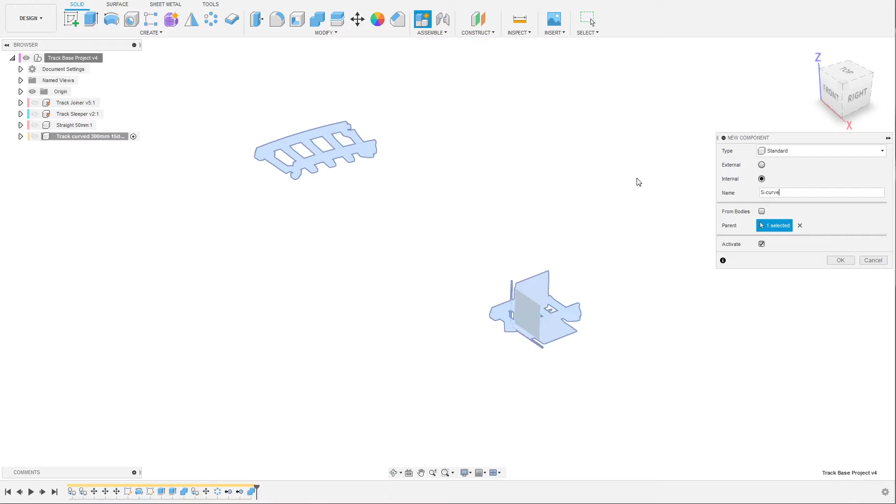And the values I choose here are just random, how long it is and how much side displacement, so you can choose whatever you need for your project.

So we do the same as before. We copy the joiner, we paste it, click OK, and we paste a new one.

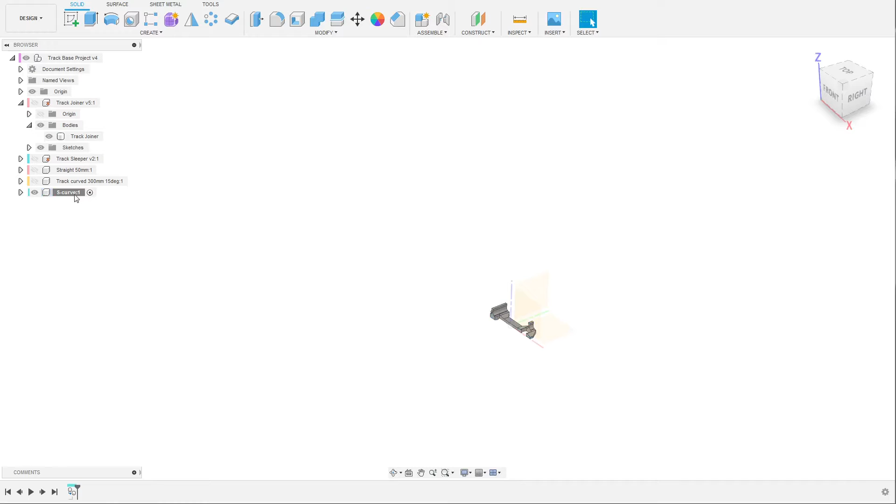Now you see I accidentally clicked OK and forgot to rotate it, so let's do that now. As before, we need to set the pivot point to the center. Click OK, and we will rotate it 180 degrees.

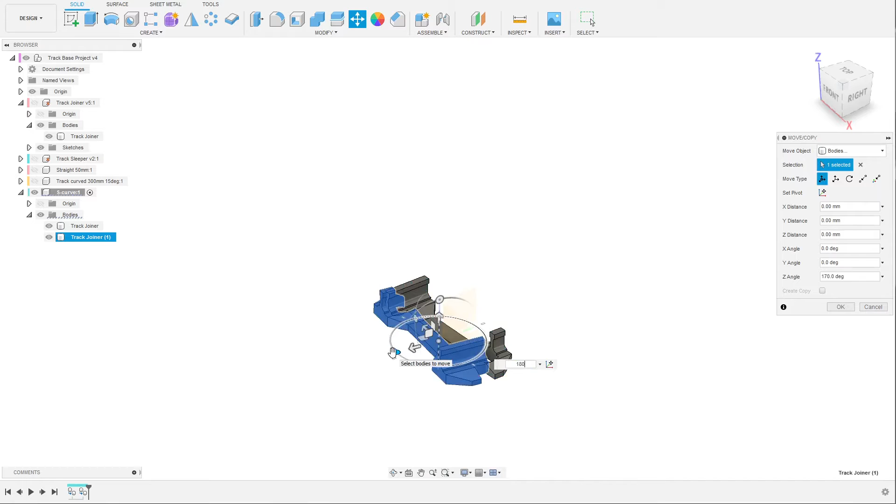Now it's time to choose where we want the track to end. So click the second joiner, and as before, click M or right click and choose move.

I suggest you do this first by dragging length, and in this case I will choose a length of 200 millimeters. And this, you should think about your build plate in your printer.

How big can you make the track parts and still print them? So that's really what governs how long the track pieces are.

So that's at least a good rule, because it's a lot harder to make long track pieces and try to divide them in the CAD software and print them and glue them together. That's not really a good idea, because these joiners work a lot better than gluing. So try to divide them into pieces that you can print.

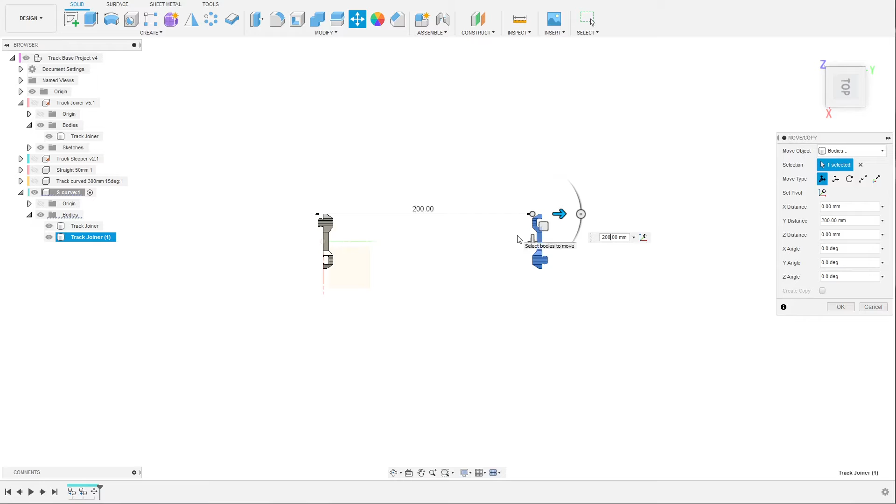So now we have this straight displacement. Now we will make the sideways displacement. In this case, I will move it out by, let's say, 50 millimeters. That will be okay. Now that's up to you how you want to do it. I'll just show you the method here.

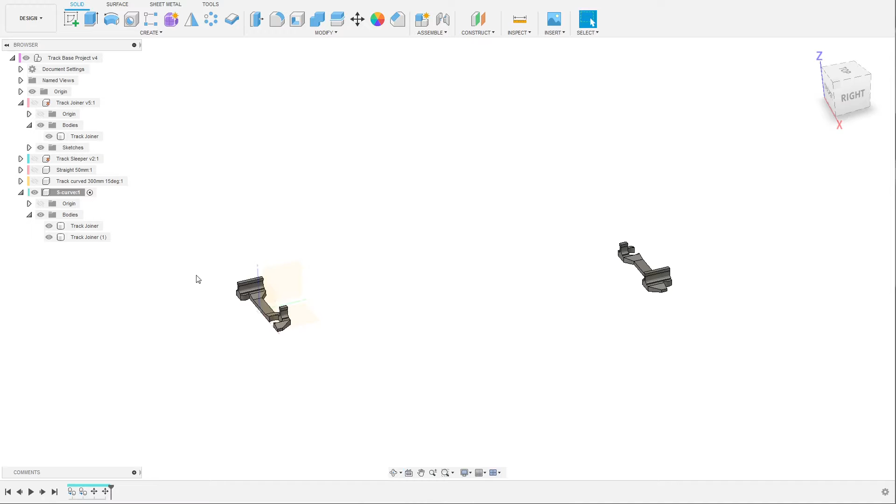So now we will do as before. We will select only the track, and we do that as the first case when we made a straight piece. We click on any of these surfaces and we create a sketch.

Now we don't really have to hide the other one because they are moved sideways, so it's not in the way anyway. Click P for project. Project both of them. You should be able to select both of them at the same time. I don't know why it doesn't work now.

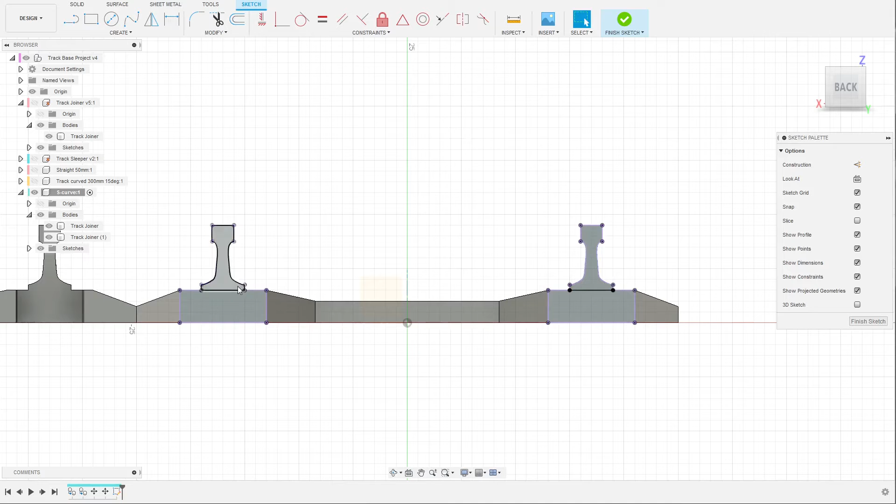Press L for line. And there we have it. You can also, if you accidentally place the line somewhere else, you can see that because then you cannot choose just the track. So when you hold the mouse over, if you can select only the track or only the sleeper part, that means your line was placed correctly.

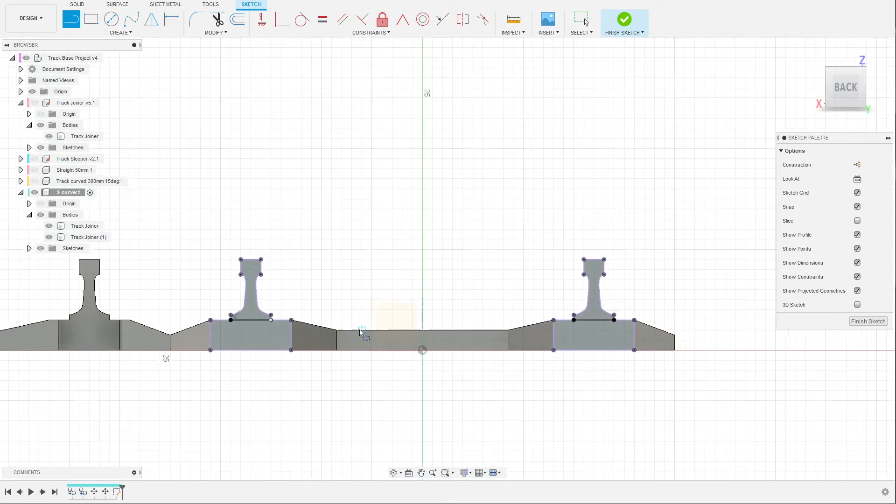Otherwise, if there's trouble, I can show you what happens if I were to accidentally put it here. So it doesn't really go all the way, but when we zoom out, that can be quite hard to detect. You can see it's white, so there are things that can tell us something's wrong, but it can be hard to see when you have complex sketches.

But the really easy way to see it is that now we cannot select only the track, as we can on this one. So that tells you the line is not correct. So then you can either delete the line and make a new one, or you can just pull it to the point where you want to connect it.

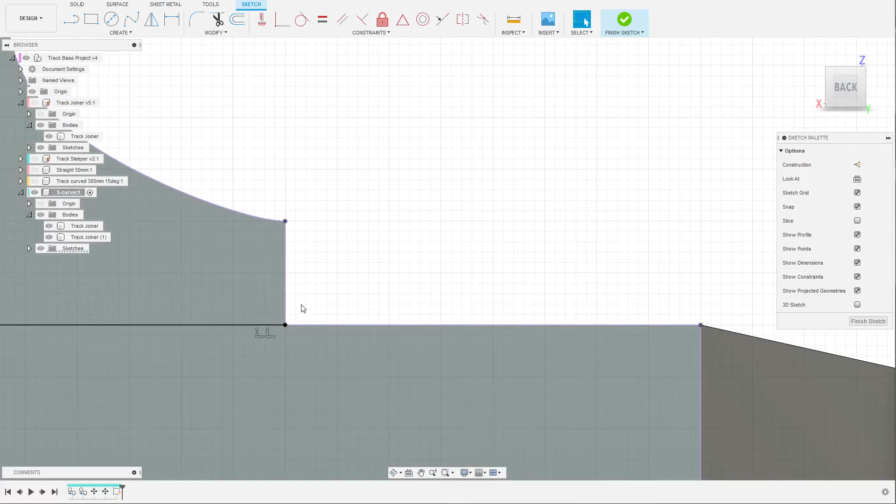Now it's all connected, and you can choose either the sleeper part or the track part. So now we cannot use the extrude tool, and we cannot use the revolve tool either.

Now we're gonna make a sweep along a path, and the path we create in a sketch. That's basically what our track is going to follow. So we will basically make the shape of the S-curve.

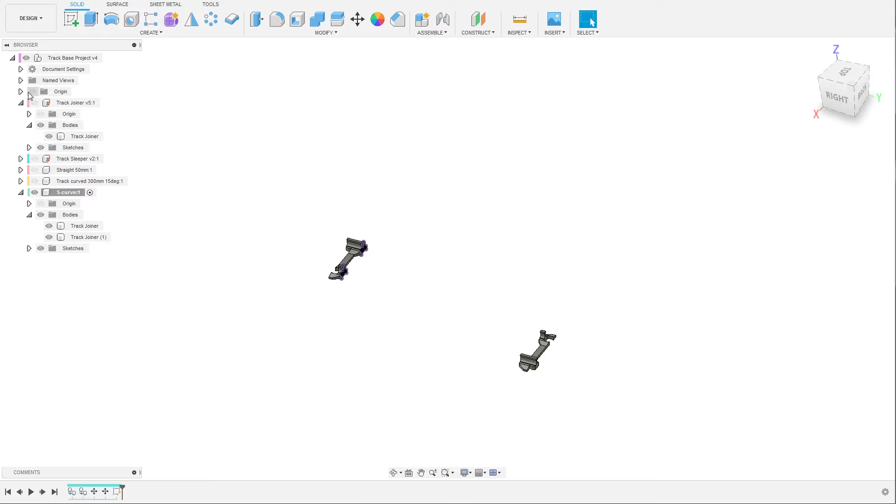So let's click the horizontal plane, and if these are not visible, that means your origin up here is not selected, like this. So you can click the visibility of the origin, and that makes these planes visible. I think if you click the sketch tool, that will make the planes visible anyway, so it doesn't matter if you have it clicked or not.

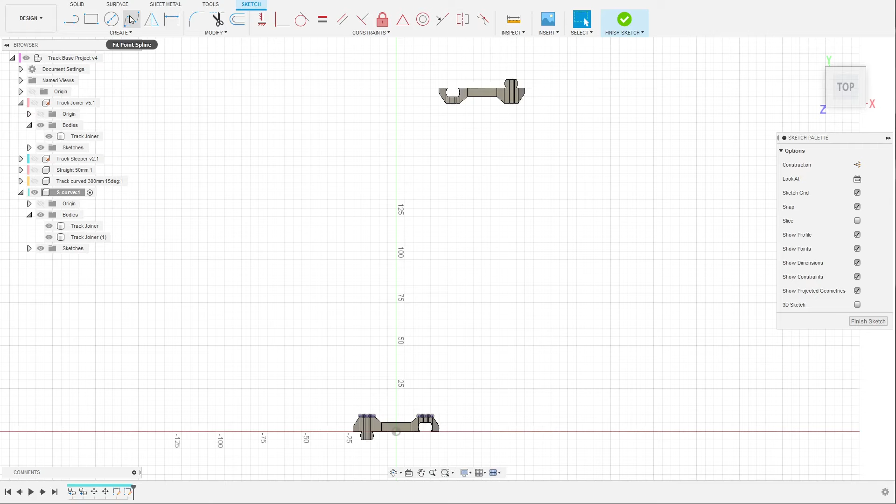So click on the horizontal plane, and there are of course different methods to sketch this, but I will make a fit point spline.

Now it's really important to choose where you start the sketch. You should start in the middle and also parallel to the end of the joiners. That's really important, because that's where we're going to start to extrude the track. So click there, and then we can zoom in on the other joiner.

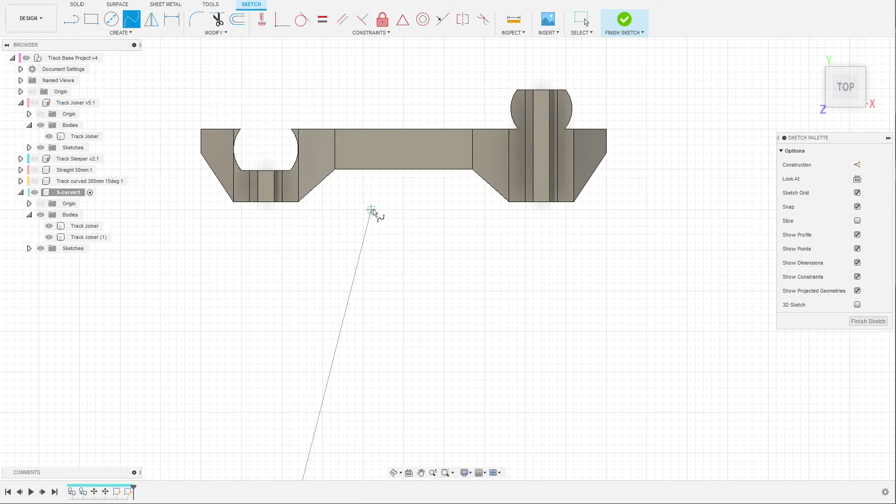And make sure that we place this point in the perfect center and also parallel to the end here. There.

And now we actually forgot something. We need to put a point in the middle.

And I think you can do that by right-clicking, insert spline fit point. Yes, you could do that. So click and then place a point. So there it is. So you can usually fix things if you forget.

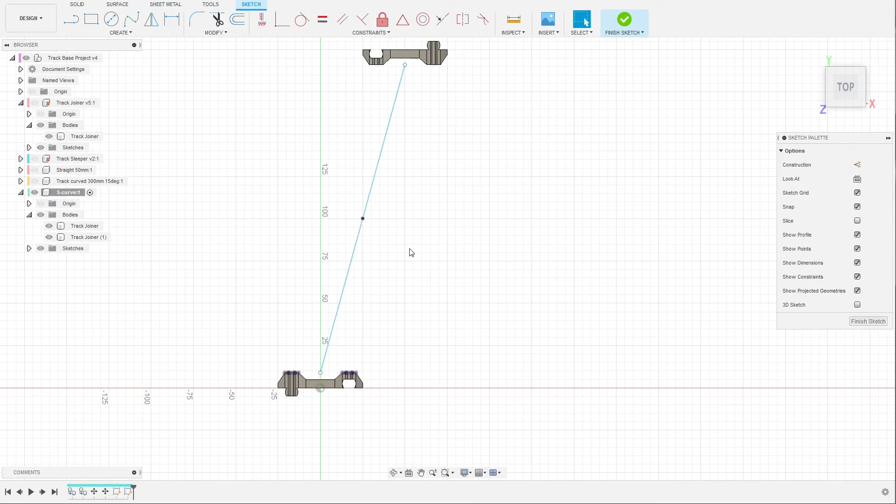Otherwise, you can just mark it, press delete, and you can make a new one. So now this is a straight line. That doesn't really look that good. So we need to make the shape.

By clicking any of these points, you can manipulate them. So what we will do, we will drag this handle here.

The further away from the center point, you can see that it affects the radius from that point. I will leave it quite close here because I don't want the radius of the track to be too narrow, because that will make it hard for the train to go through here.

Now this looks really well, I think. We don't really need to do anything to this point, because that will just make the track look really weird. If you accidentally pull something, you can always press Ctrl Z, or you can press the back arrow up in the menu. But this looks really good, I think.

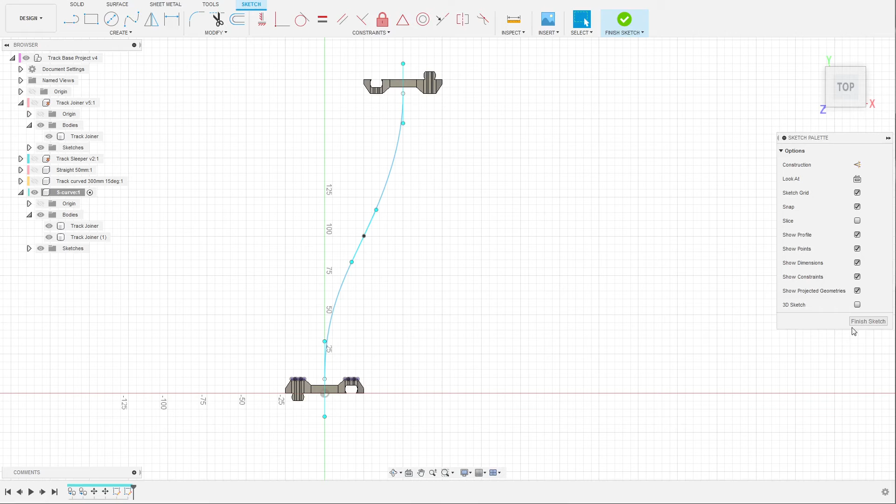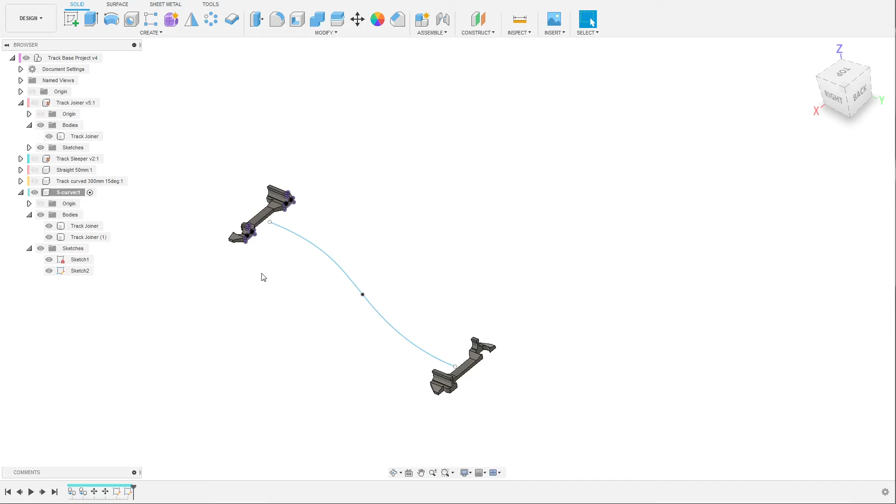So let's sweep the track along this path that we created. Now this sketch should be visible after you press finish, but if you do something else and the sketch is not visible, you can just expand the tree, and under sketches you have the sketches, and now we want both sketches that we made to be visible. So what we'll do now is we click create, and we will do a sweep.

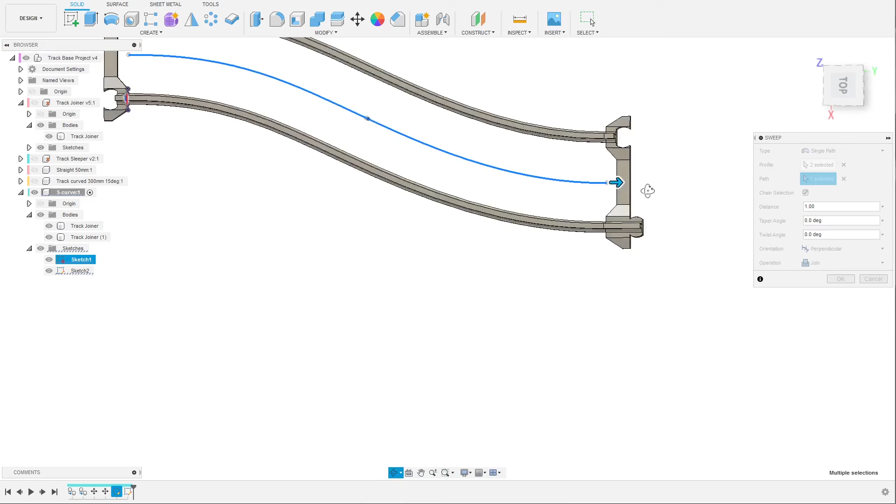First we need to choose the profiles. So we choose our track, and then we need to choose our path. And as you can see, it almost does it perfect right away. That really depends on where you put these points on the path. If you didn't place them correctly, this will not align. But that's okay, you can go back and edit the sketch.

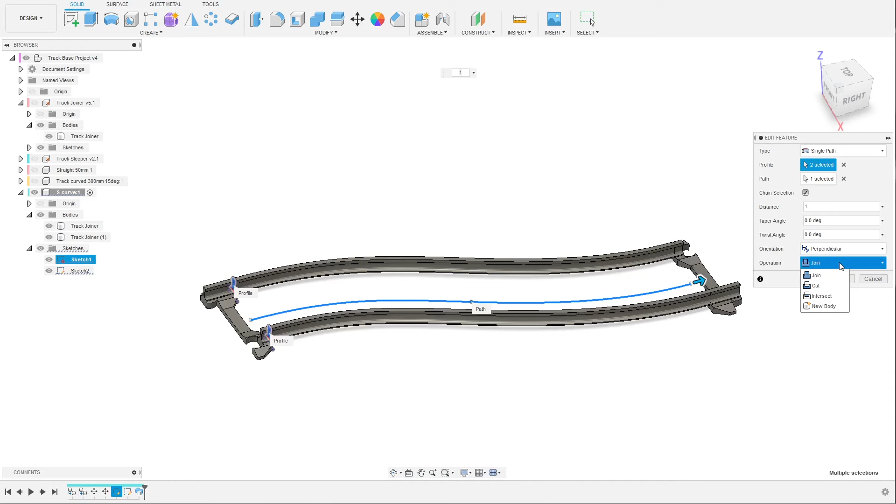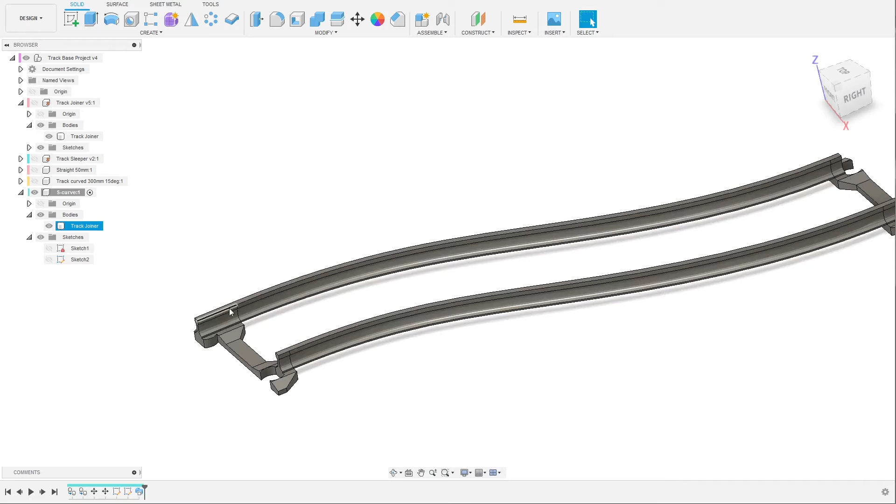That's no problem, so let's click OK. Now you can see that when we did that, we had join selected here. Fusion automatically did that because it thought we wanted to join. That was okay, we wanted to do that, because that joined our joiners and the track, so that also means that our component worked. And as a change from the curved track piece we did, now it's okay that we had a short piece that is straight. That doesn't matter because this one is so long anyway.

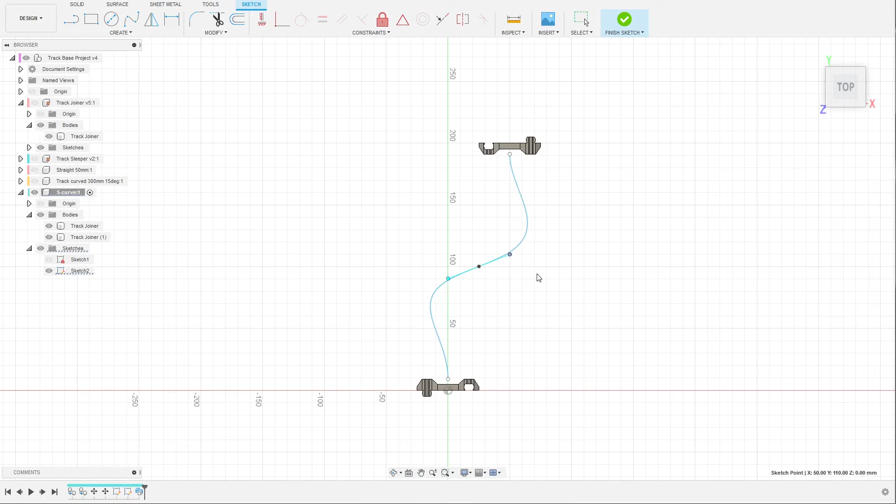A neat thing with the path is that you can actually go back and edit the path afterward. Just click on the sketch in the history, click on a point, and let's make it really crazy here and see what happens. Yeah, that track would be kind of hard for the train to go through.

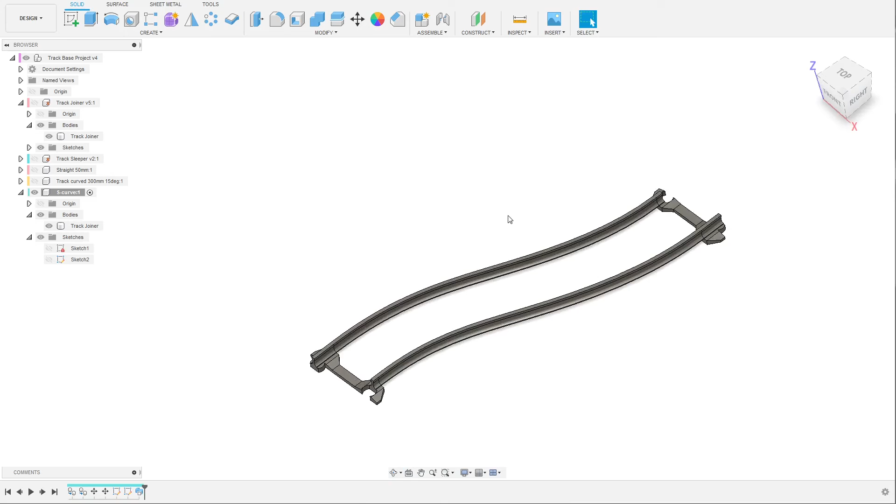And you can click the back arrow like that, or you can click Ctrl Z. So now we have the track finished. Now we want to add the sleepers, and we can actually use the same path to place the sleepers.

So let's copy the sleeper body. You can see that it's really important here that I copy the body, I do not copy the whole component. That's because I want to combine them later. So copy the body and go ahead and hide that one so it's not messing with us. Right click on bodies and click paste, and you can click OK.

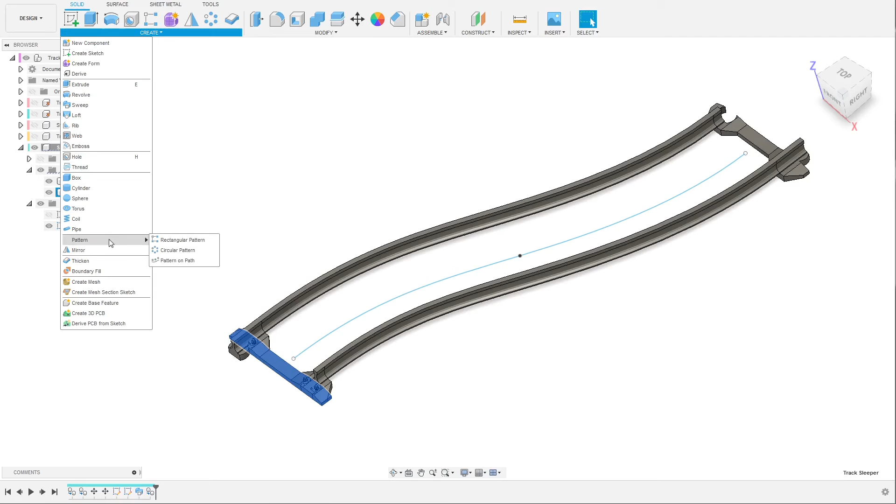Now we're gonna make a pattern on path with this one. So mark the sleeper, and actually before that you can click the visibility of the sketch that contains our path so that it's visible. Again, mark the sleeper, click create, click pattern, and pattern on path. You can see that we have body selected, we have one already selected, that's fine. So we click on path, and we click on the path that we made earlier.

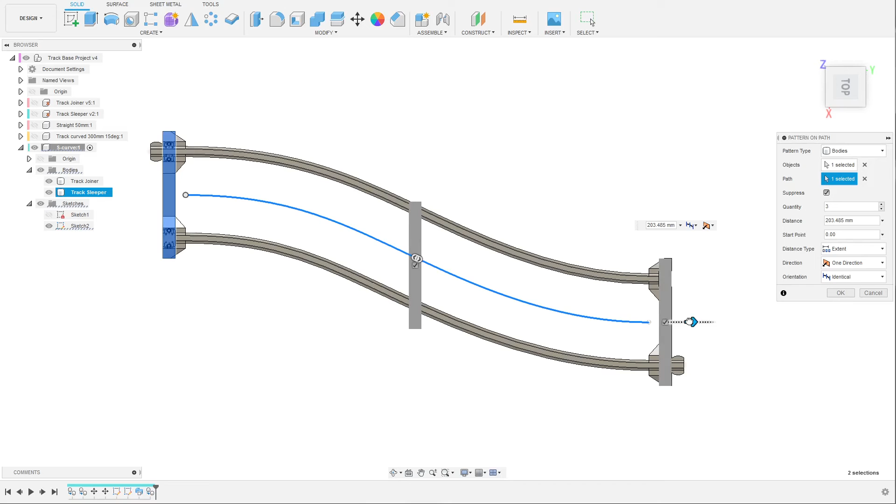Now Fusion wants to know how far we want this to go. And also you can see that the shape is really weird, and we will go ahead and fix that. Now the path is a little bit longer than just the actual sketch, so again, I'm just placing this, I'm just eyeballing this. You can of course measure and do it with precision, but I don't really see the need to.

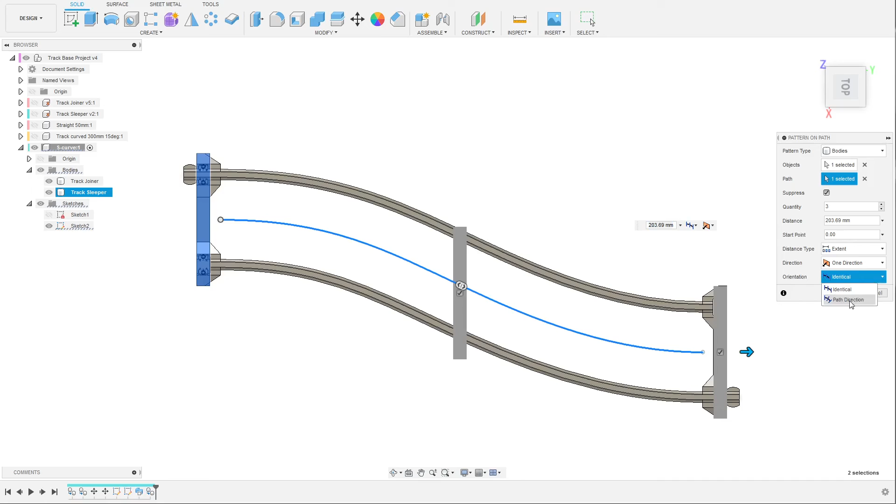So now to fix this, that it looks really weird, we can click the orientation drop down, and we can choose path direction. That will actually fix this problem. And now we can also go ahead and choose how many we want. So let's try 10 of them and see how it looks. That looks kind of good, I think. Yeah, let's use that.

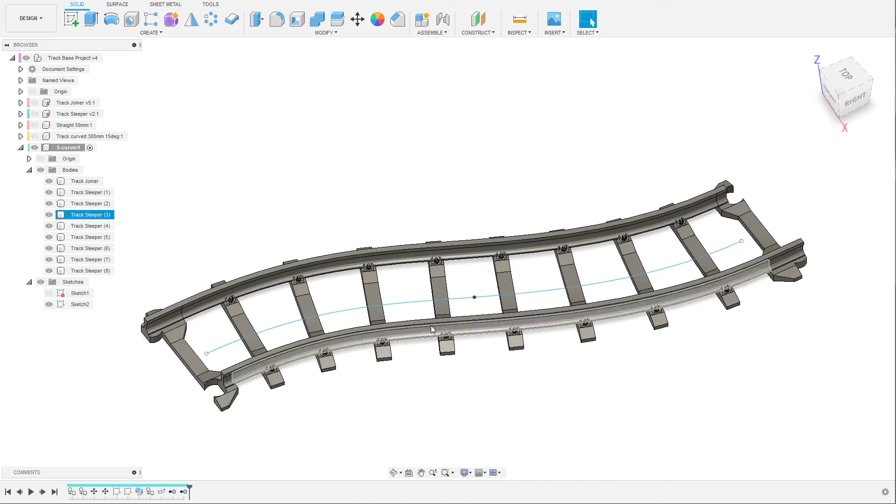And as we did before, I will mark the first and the last one, and I will remove them. Some of you might wonder why I do that. I think it's easier to do like that right from what I know about the tools right now, because when I do that I can see where the first one starts and the last one ends. So it's really easy for me to see where it starts and where it ends. It's just a matter of how you prefer to do things. There's probably a good way to do it without having to remove the first and last one, but I do that for now because this is just eyeballing.

This is a decorative piece, really. And also, of course, it's not just decorative when it comes to printing, because we cannot print the track just in thin air. So that's also a matter of placement, that you want enough sleepers so that your printer can bridge the gap. With a track like this, you don't need to use support, this can be printed as it is.

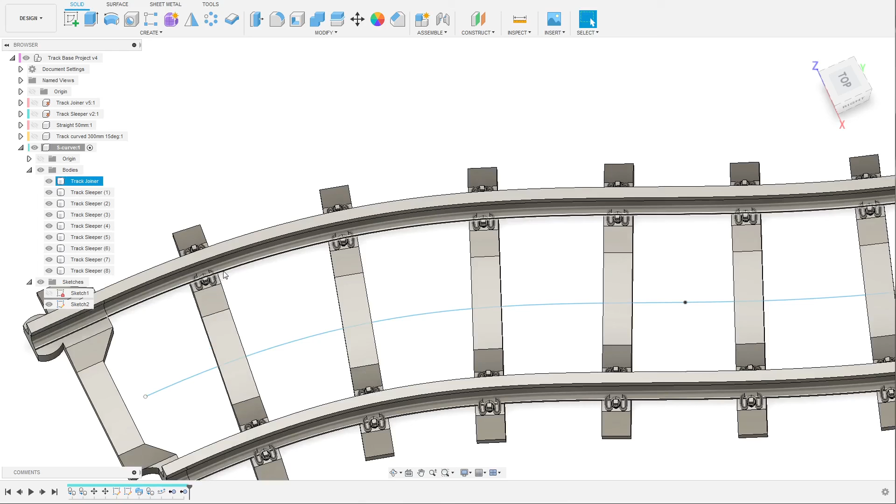You could have some strings going on the inside of the curve when the printer is doing this line. That will probably be a straight line first when the printer tries to bridge this gap. But I don't really care about that, because that might be just a couple of strings here that you can just sand off, or remove with a knife. But as soon as the printer goes up a couple of layers, the track will be just fine. So that's not really something to bother with, it's not like it's gonna break your print or anything.